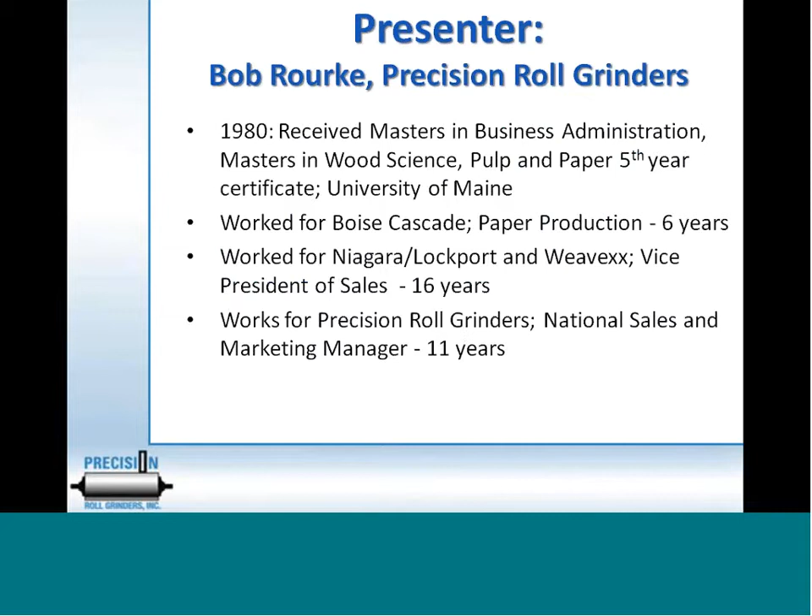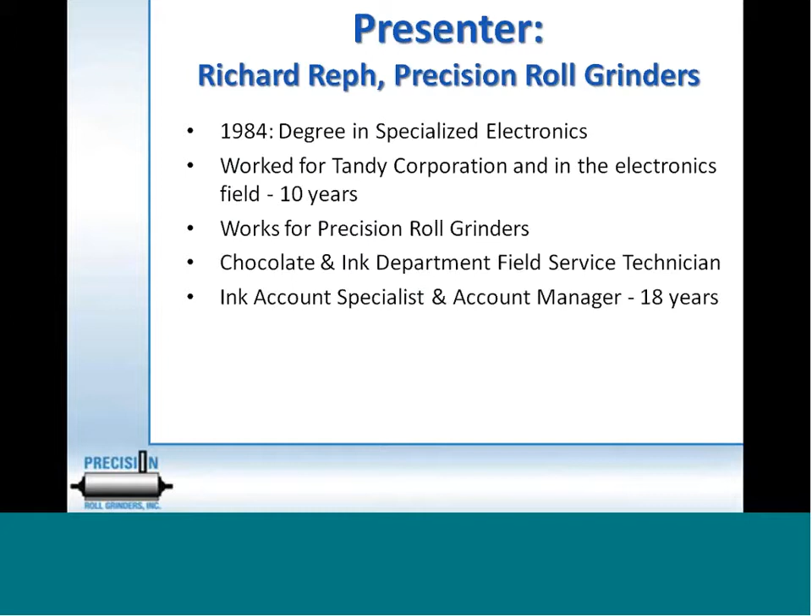PRG has been servicing ink mills, ink rolls, and ink customers for over 35 years. Our facilities are equipped with state-of-the-art equipment and the knowledge which allows PRG to maintain the tightest grind tolerances for our customers. We have the parts and can service all makes and models of triple roll mills. Finally, we have dedicated specialists for ink mill rebuilds and upgrades.

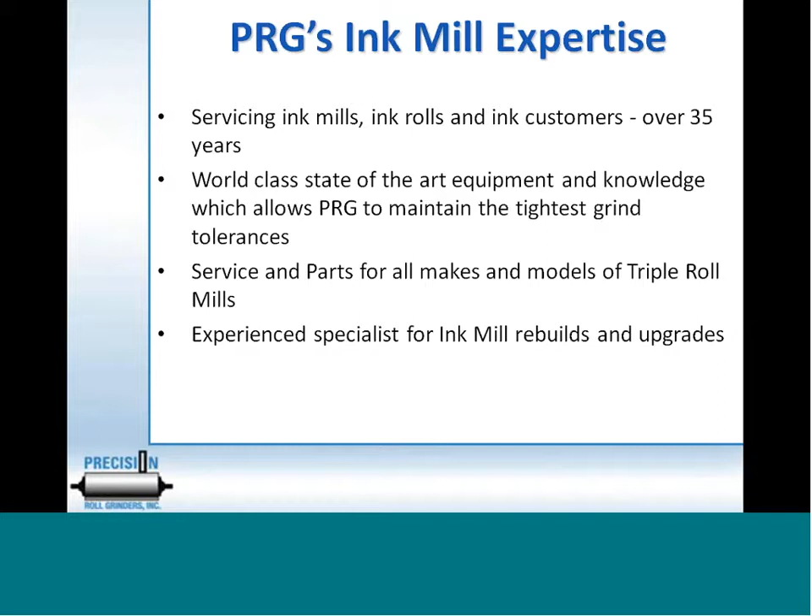Who is ANSI? What is the ANSI 2007 as it pertains to your three-roll mill requirements? Employer responsibility and employee training. I will also talk about how PRG can assist in meeting your company's safety goals. And finally, we will have a questions and answers segment.

Who is ANSI? ANSI stands for the American National Standards Institute and is a nonprofit that supports and facilitates standards for U.S. products, services, processes, and systems.

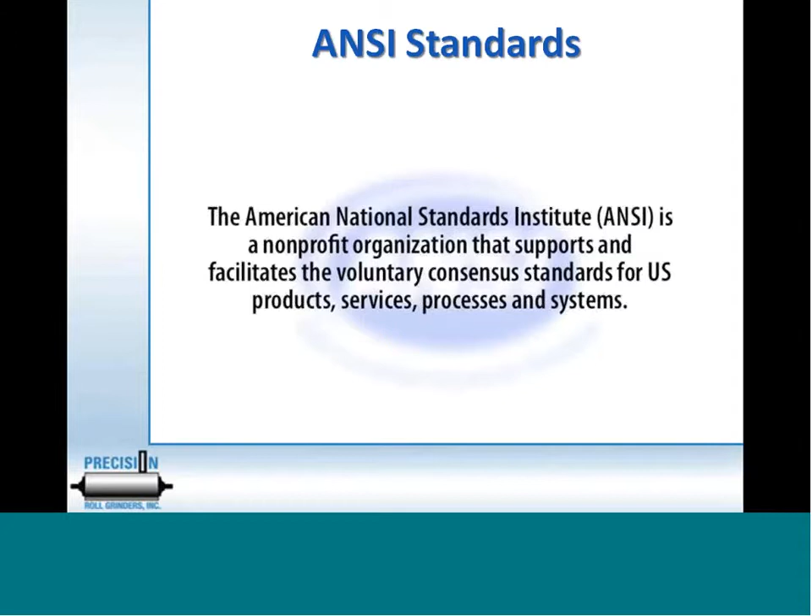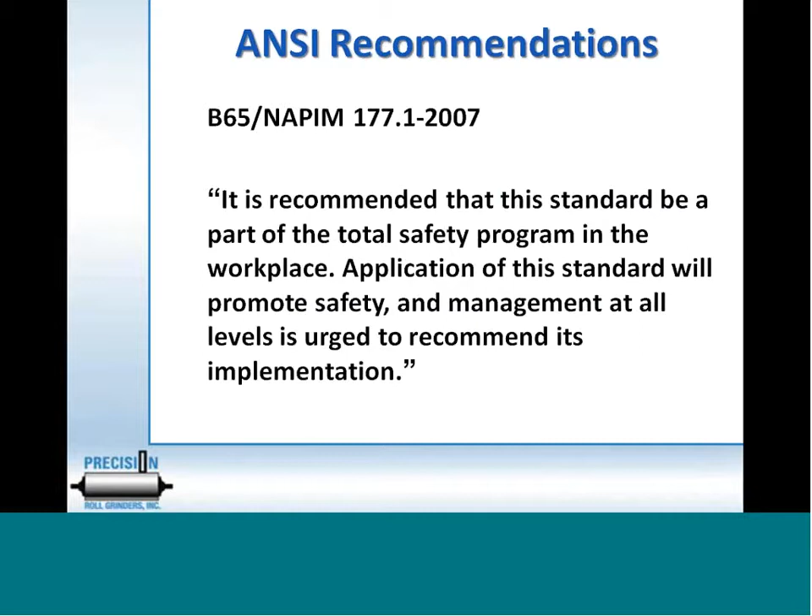The current standard for three-roll mills is actually a revision of the 1997 standard and was developed with the input of NAPIM, or the National Association of Printing Ink Manufacturers. The standard states that it should be part of the Total Safety Program and that the implementation of this standard will promote safety. It urges management at all levels to promote the implementation of this standard.

We will now look at what the standard requires.

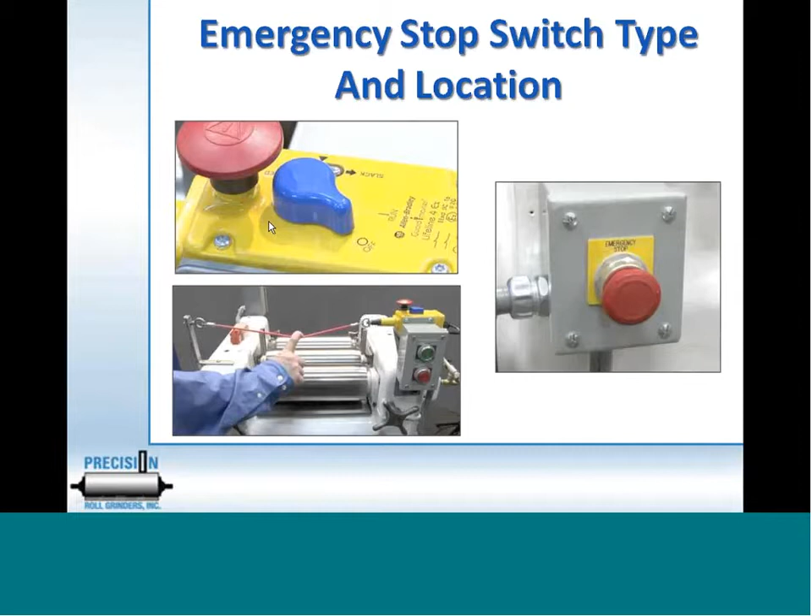The first requirement I will point out is the type and location of emergency stops and control switches. The e-stops must be of a latching or maintained type. This means that once activated, the switch or control panel must be physically reset before the mill can be started. PRG recommends that e-stops and control switches be located on both the feed and the apron sides of the mill,

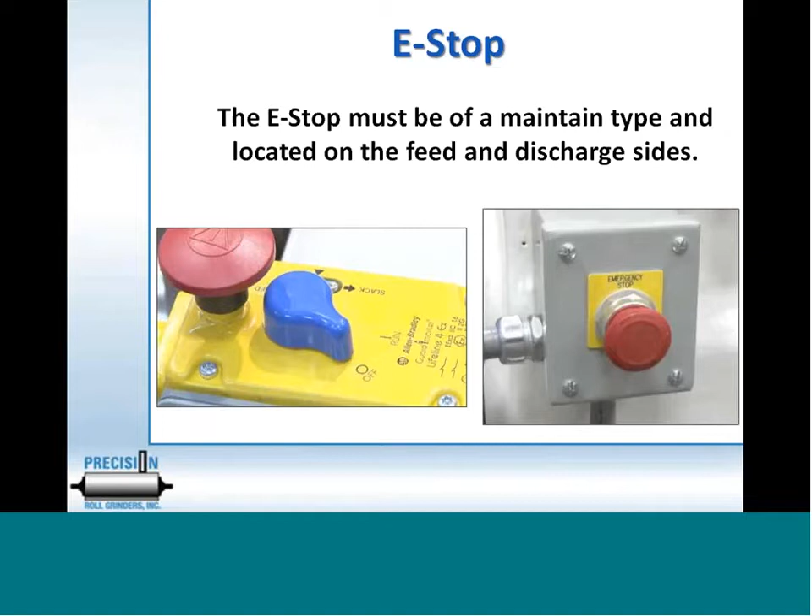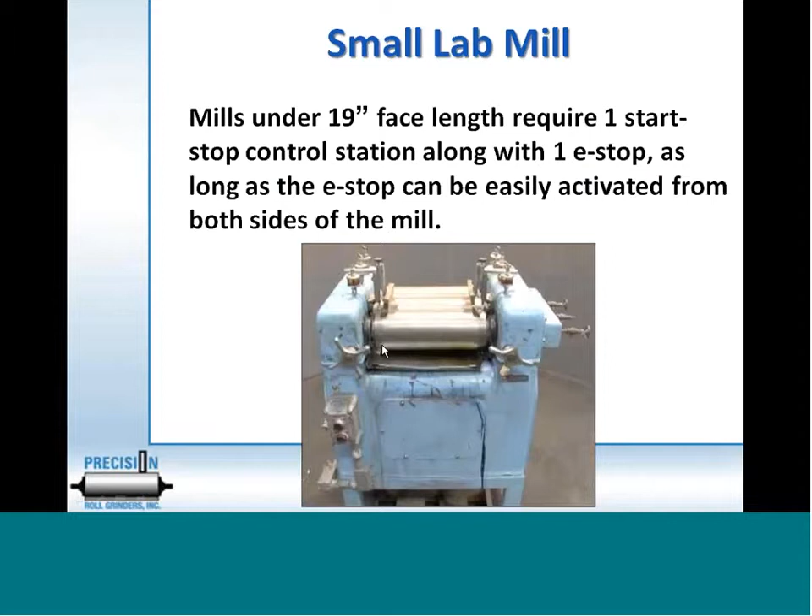but the standard is actually broken down into two types of mills based on the working face length of the rolls. Small mills with a roll face length under 19 inches only require one control station and one e-stop switch as long as the e-stop switch is easily accessible from both the feed and the apron sides of the mill.

Large mills with a face length of 19 inches or greater still only require one control station, but require e-stops on both the feed and the apron side of the mill. And the feed side must also have a cable-type e-stop. Again, all e-stops must be of a latched or maintained type.

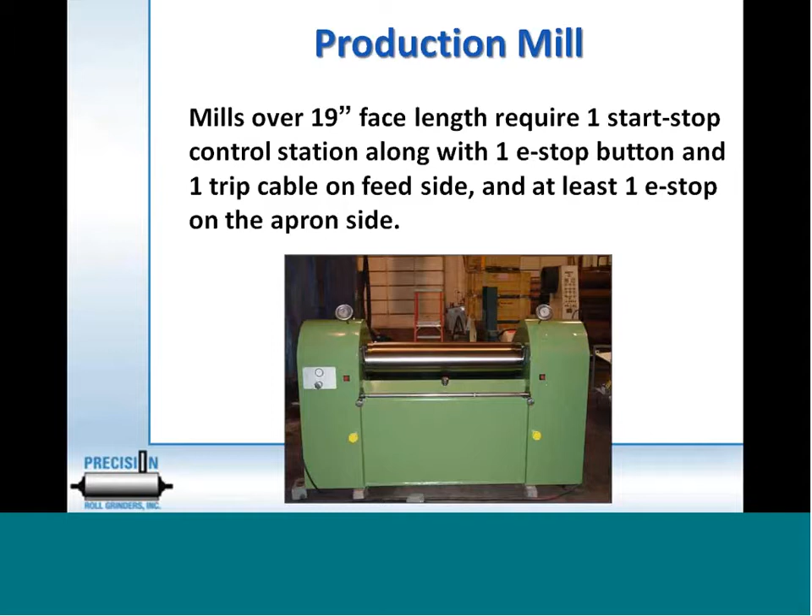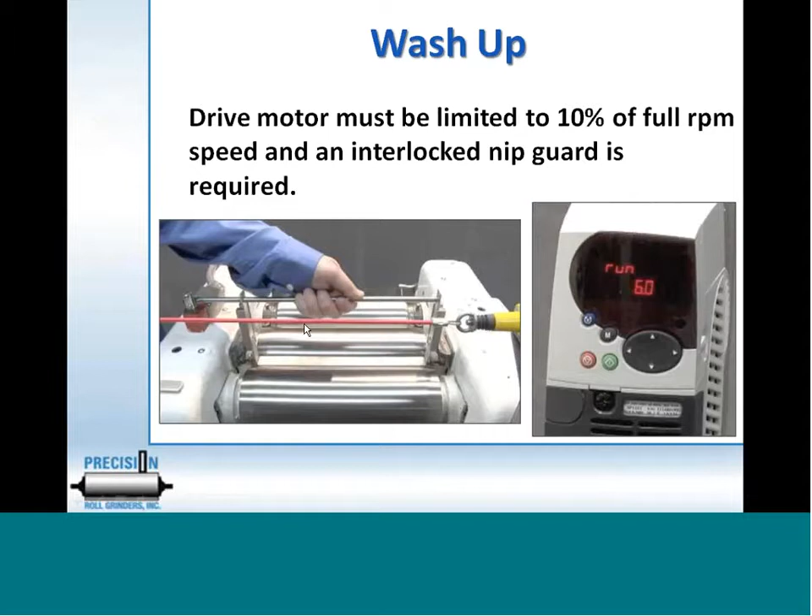A wash-up mode has been added in the newest standard. In the wash-up mode, the drive motor must have its RPMs limited to 10% of the maximum motor RPM speed. So if the full speed is achieved at 60 hertz, the wash-up must be set at 6 hertz or less. The wash-up mode must also include an interlock nip guard. This nip guard replaces the old wash-up stick.

The standard also adds a braking requirement to the mills. When the e-stop is activated, the feed roll must stop its rotation within 1/3 revolution in wash-up mode and 1 revolution in grind mode. Both the braking and wash-up are achieved through the use of a variable frequency drive controller controlling the drive motor.

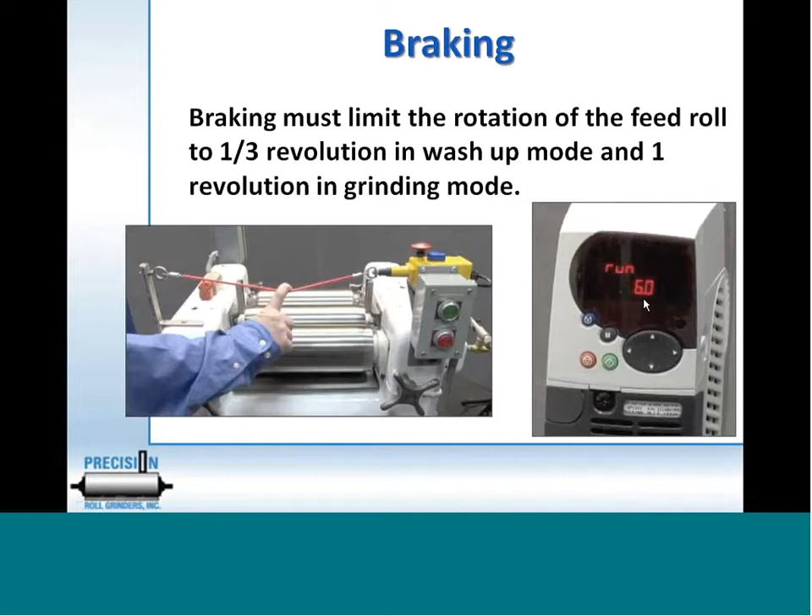The implementation of this standard falls on the shoulders of the companies who own and use the mills. The time frame for the implementation of this standard is based on the status of the equipment. Existing equipment should be in compliance now with respect to the switch type, switch location, and employee training. However, the wash-up and braking requirements are to be brought into compliance by January 2020.

New or existing equipment that has been purchased and moved shall be in compliance prior to the mill being used, and the same goes for mills that are being rebuilt. Again, it is the owner and user of the mills that are responsible for making sure the mills meet the requirements. The employers are also responsible for employee training, which should be completed before using a mill for the first time, and refresher training should be offered from time to time.

Walking surfaces should be kept clear and clean. Spills should be cleaned up immediately. Rags should be kept away from the mill and stored in approved containers. And most importantly, mill controls and e-stops should be kept clean and tested for operation.

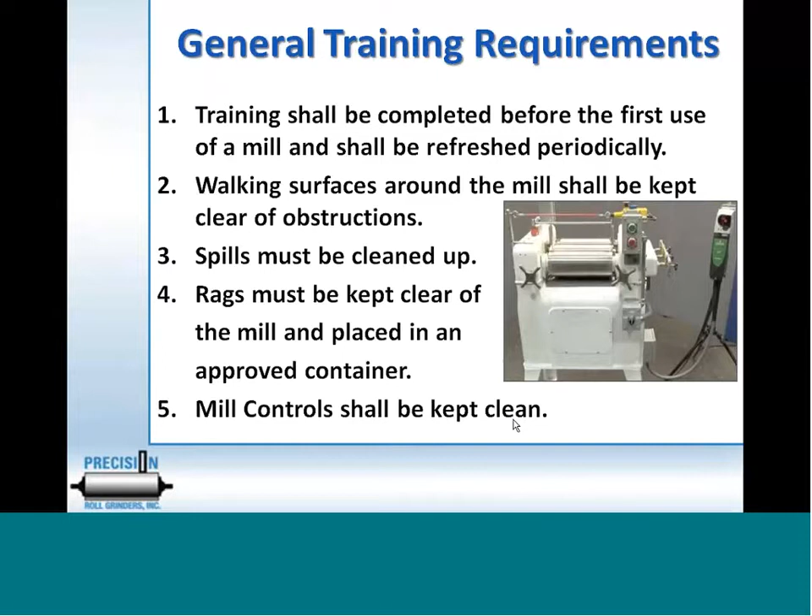The time to find out that an e-stop may be stuck or malfunctioning should not be when it's needed most to prevent an injury. Employee training should include some common sense issues along with some specific issues.

Never reach across the rolls from the opposite side when the rolls are running. If using a scraper or spatula, the length must be at least 1/2 the diameter of the rolls it's being used on. So if we have a 5-inch diameter roll, the spatula should be at least 2.5 inches long.

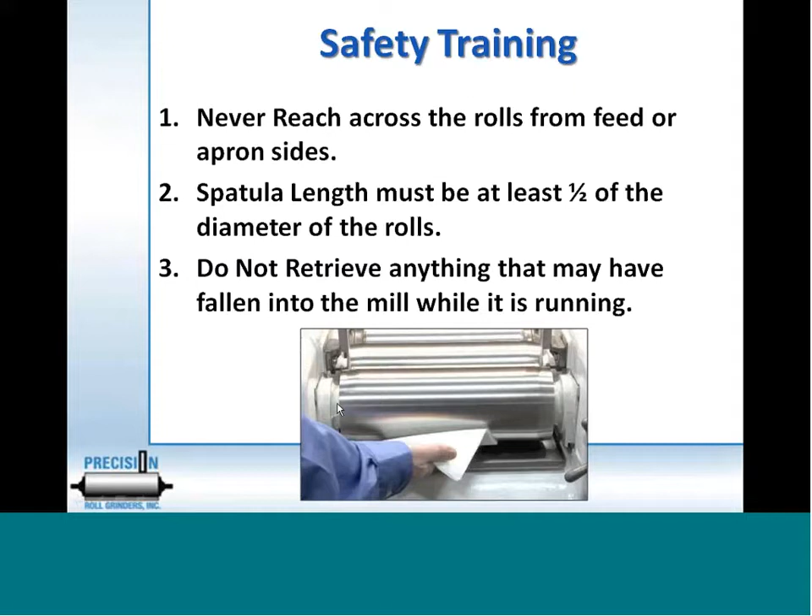This is to allow time to release the item if it is caught in the rolls or between the nip. Also, never try to retrieve an item that has fallen into the mill while it is running. Engage the e-stop before worrying about getting the item back.

There are also specific procedures for cleaning the rolls in wash-up mode. These procedures are called out in more detail in the actual ANSI standard. These include stopping the mill with the e-stop prior to scraping down the side plates and residual product, running the remaining product out of the mill and re-engaging the e-stop.

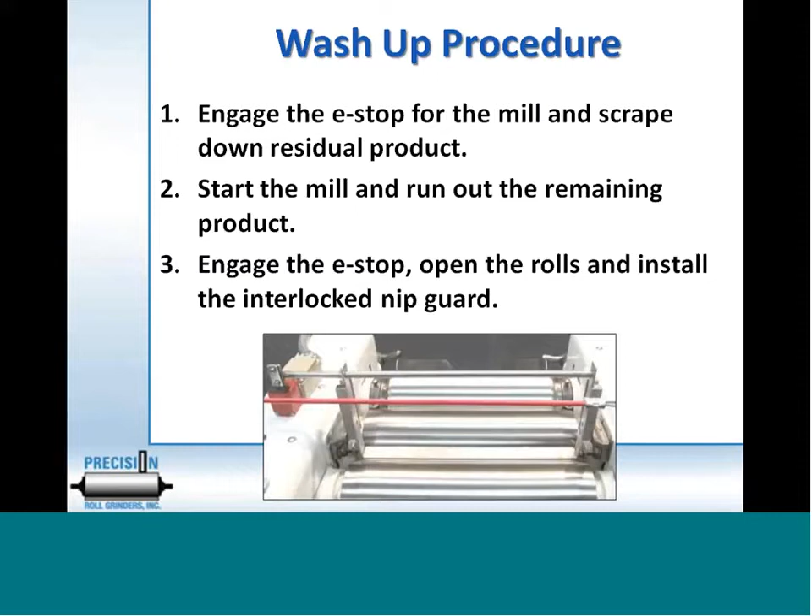The roll should then be opened and the interlocked nip guard installed. The roll mill can now be safely run in wash-up mode.

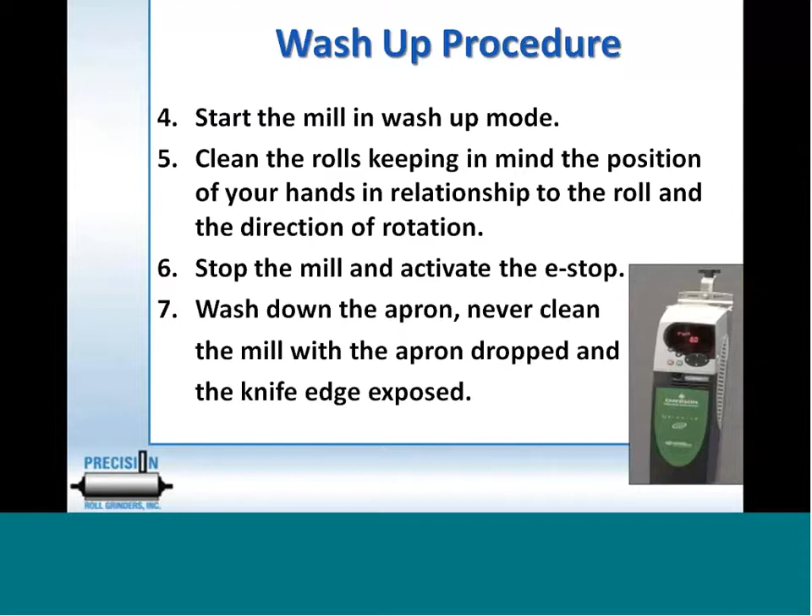The roll should be cleaned, but always keep in mind the relationship of your fingertips in the direction of the rotation of the rolls. The standard has illustrations of the proper hand positions for each roll to be used during cleaning. Once the rolls are cleaned, stop the mill and activate the e-stop.

Now the apron can be washed down, but never clean the apron if it has been released from the roll or the knife edge is exposed.

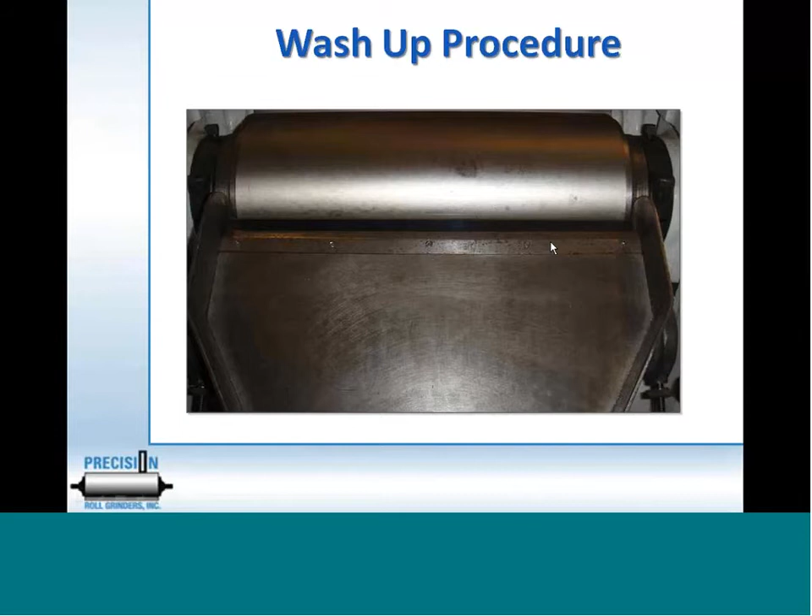When changing the knife, be sure that the e-stop is engaged. Release the apron from the roll, being careful not to come in contact with the exposed knife edge. Always wear cut-resistant gloves when working with the knife blade, and use pliers or vice grips to pull the blade from the apron.

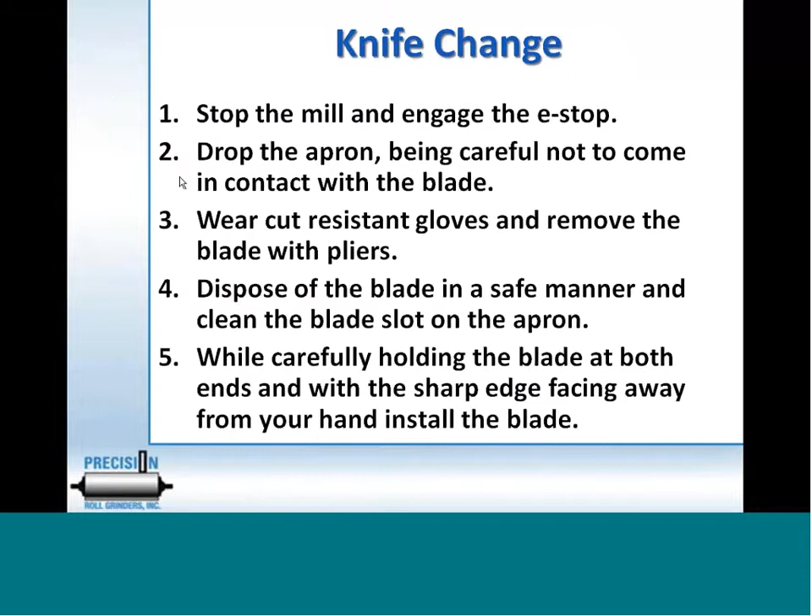Be sure to dispose of the used blade in a safe manner, and continue by cleaning the blade slot on the apron.

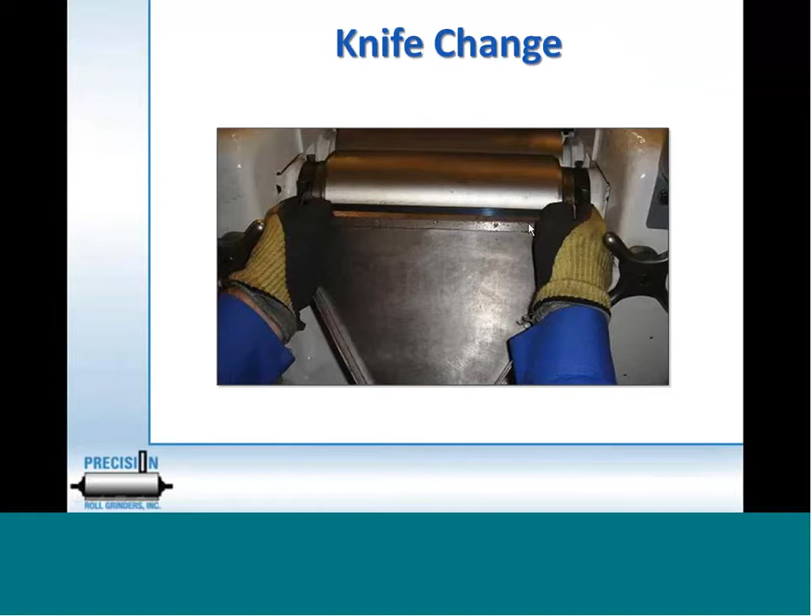To install the blade, hold it by both ends with your gloved hands, making sure the sharpened edge is facing away from your hands, and install the blade into the slot of the apron.

PRG offers complete 3-roll mill refurbishment along with roll grinds, gear cutting, side plate, and apron repairs. We also offer field service for repairs, roll swaps, and employee training for ANSI compliance.